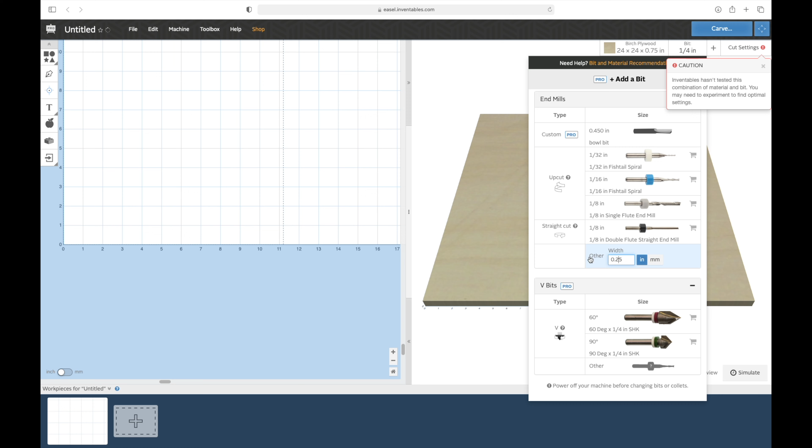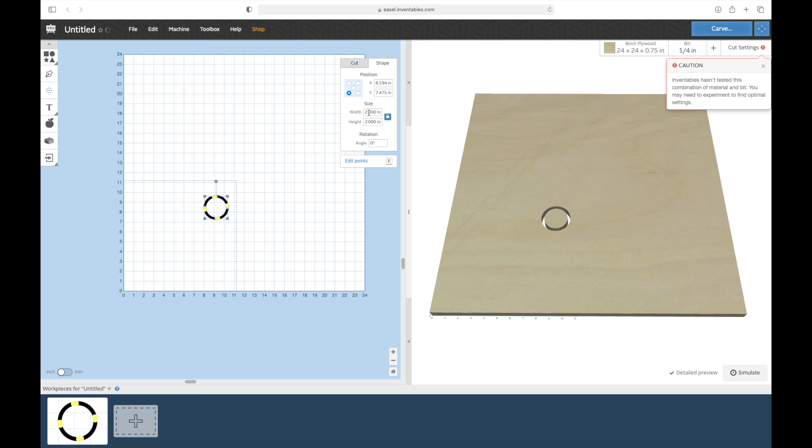Now over here, we're going to make our circle. We're going to make this a 20-inch circle, cut all the way through, cut outside shape path, lock that, and now turn that 2 into a 20. Center this to the material.

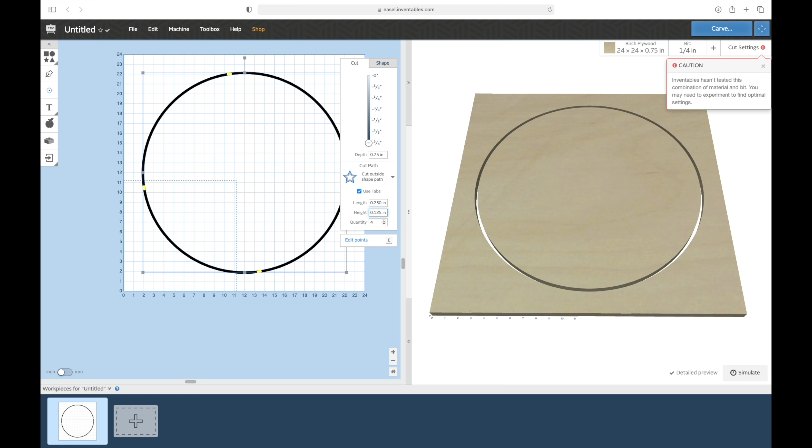And we want to use tabs. Make sure you got your tabs on. I'm going to change the height of my tabs to 1/8 inch, or 0.125. And I believe that's ready to cut.

I'll also say that if you're unsure of the feed rate, Easel is pretty good about setting up everything automatically, but you can change it to manual and make things a little faster. The machine I'm using is definitely capable of doing this faster than 30 inches per minute, so I'm going to go ahead and change that.

Now once we have that first baseboard cut out, we can go ahead and use the same 20-inch circle we used before, and now we can add the circles that the rods will sit in. So we'll add a circle, and we're going to make that a 2-inch circle. So we'll go ahead and lock it.

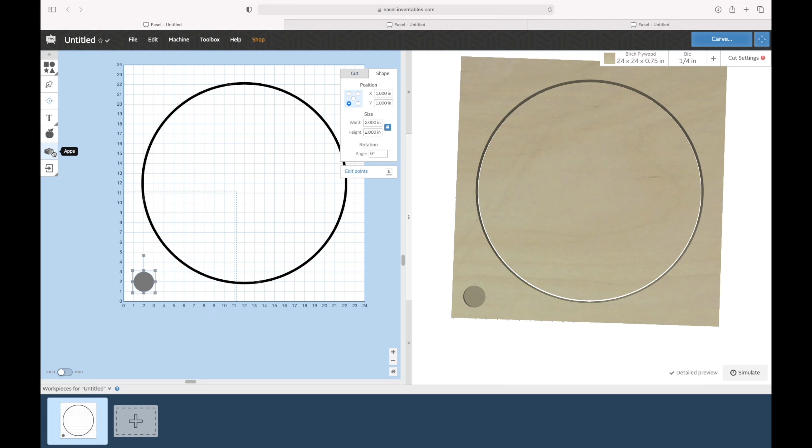Now with it selected, we're going to go up here to apps, and we're looking for radial array. Right here is radial array. Click on it. We're going to do 20 rod holders, so up here at shape count, we're going to do 20. Now this is where it gets kind of confusing.

It's speaking in radius. I want about 1 inch from the outside, and then we have a 2-inch circle, so that's 3 inches. To get to the center of this 20-inch circle is 10. So 10 minus 7 is 3. So we're going to put a 7 up here.

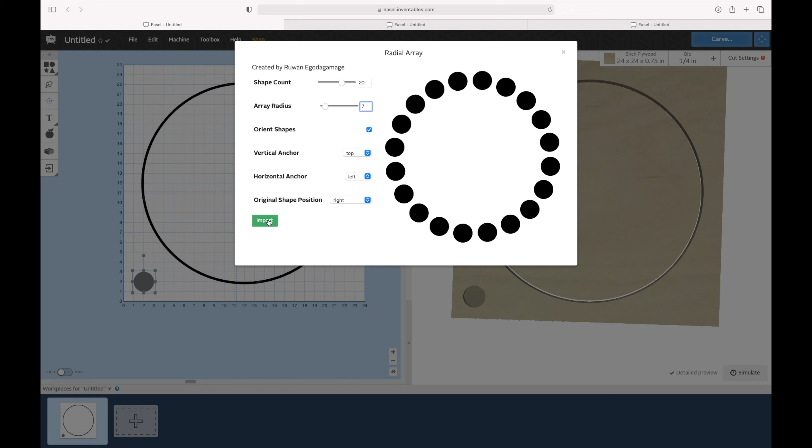And we're going to import that. Leave original.

So now that it's up here on this page, we're going to go ahead and move this over here out of the way, and we want to move this big circle down out of the way. Now we want to select all of these, and we're going to combine them, so now when we want to move it, they're all moving together in uniform.

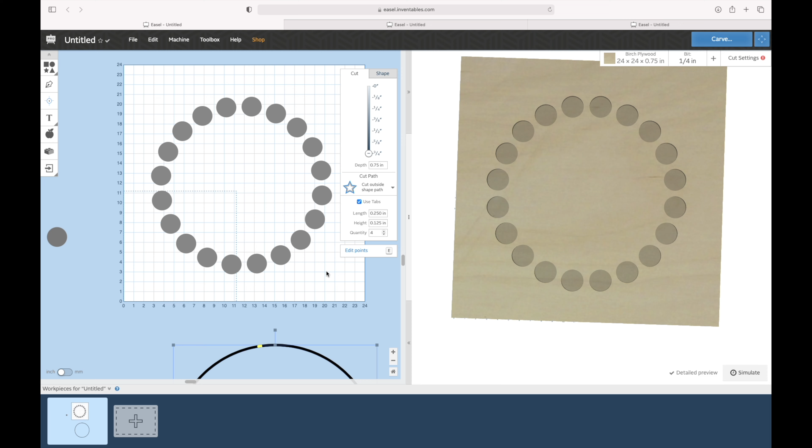We're going to change that to about a 1/4 inch pocket, and we're going to leave it clear out as pocket. Now we can go ahead and select both of these, and we can center to material.

I think that looks pretty good. We'll probably stick with that.

Now with this circle, we can go ahead and change it. We'll use this one for the dowel rod that I'm going to use for the pedestal. The dowel I have is 1 3/8, so we'll change this to 1.375.

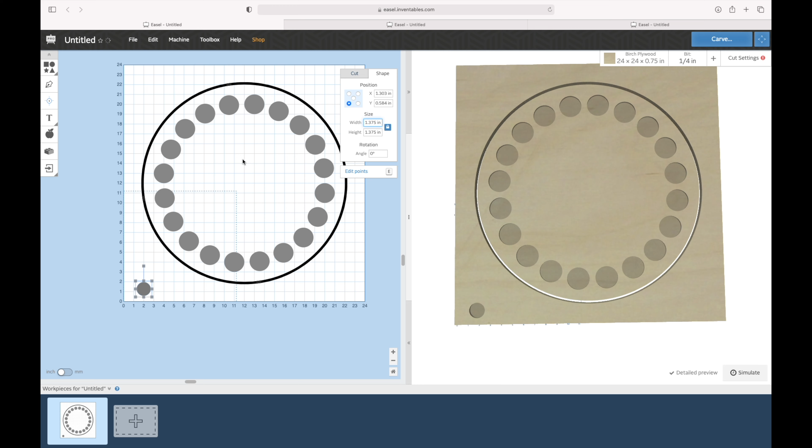We'll center that to material, and I want it to be about a 1/2 inch deep. I think that looks pretty good. The tabs are the same as before.

So we'll go ahead and center this again in case we moved anything. And now that's ready to cut.

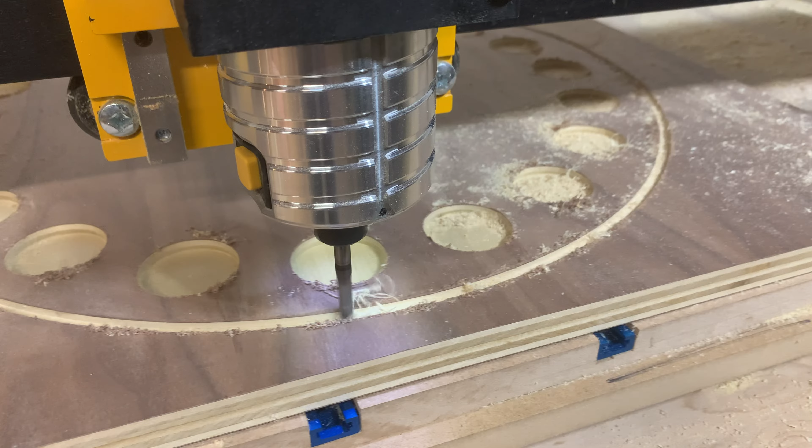Now that we have both the bottom base and this rotating board cut out, we can go ahead and make our top pedestal piece.

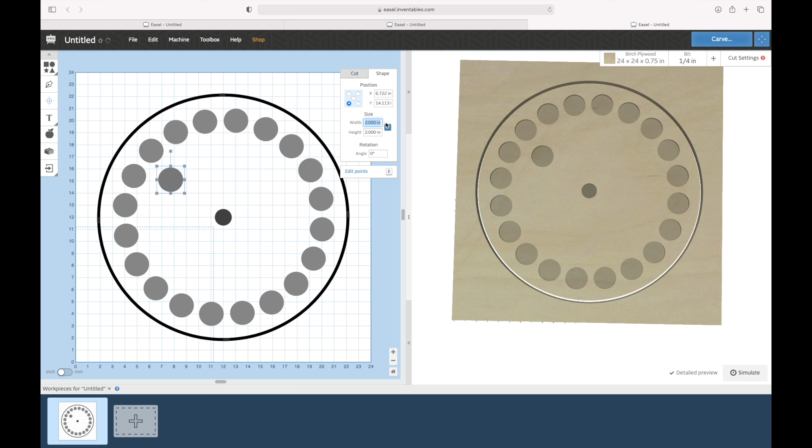So we'll make another circle, and we want it to be just inside of all these circles. Let's try to make it 14 inches. That's good, that's what we want. We want it just inside these outside circles here. So we'll go ahead and copy this.

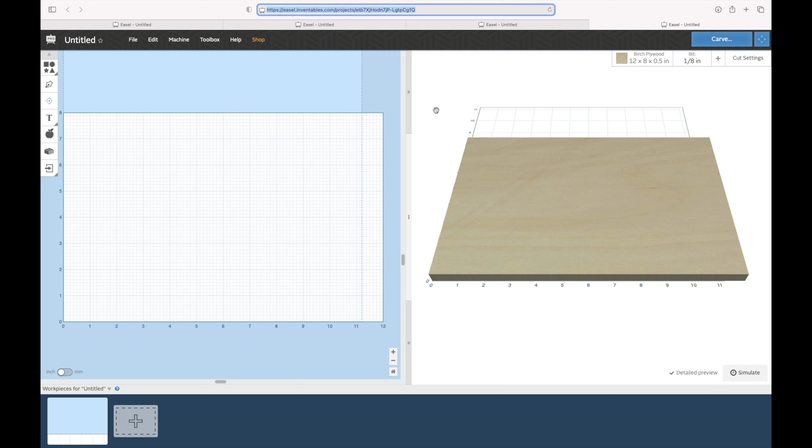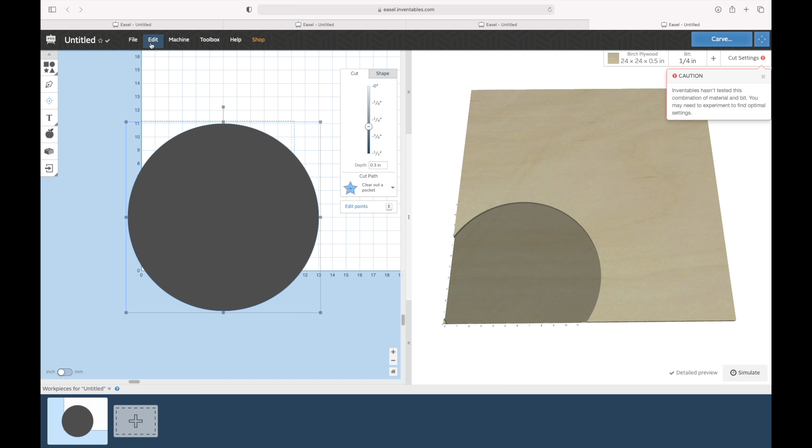Let's start a new tab. Change our dimensions again. This top piece is going to be 1/2 inch, so we'll leave that alone. We're going back to the 1/4 inch size bit. Bring that into view now, and we'll go ahead and center that. This will get cut on the outside shape path and all the way through.

Bring our tabs up to 1/8 inch. That's not necessary, I just like having a little bit beefier tabs because I go faster with my machine.

When we cut this out, it will be the bottom of the top piece. I want to add little tabs on the bottom that you won't see from the top, and these will be placement markers to show me where I need to put the fishing pole holder clips. Otherwise it would just be a guessing game for me.

So select that circle. I'm using a 1/4 inch bit, so it needs to be just a little bit bigger than a 1/4 inch. We'll go 0.3, and with it still selected, we'll go back up here to apps and radial array.

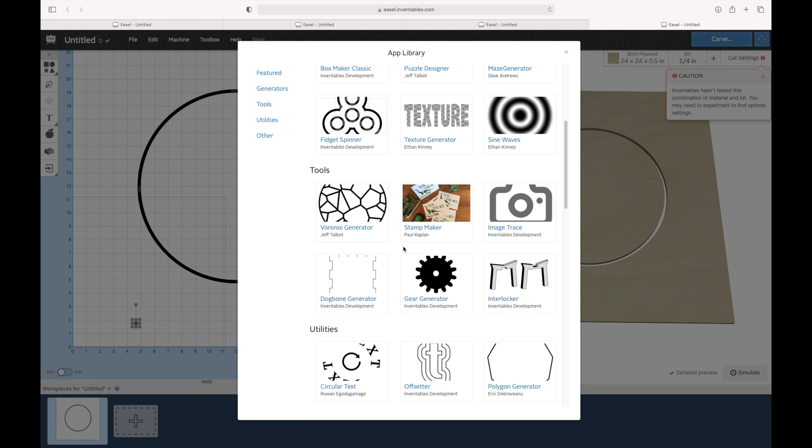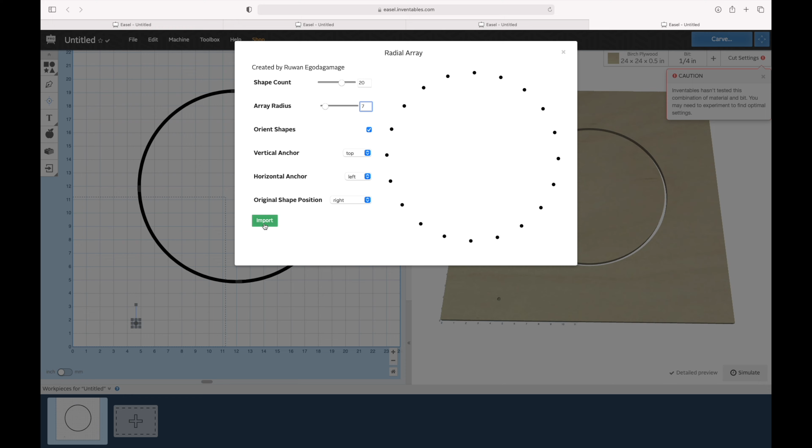Again we're going to do 20, and we want these to be right on the outside edge almost. So since it's a 14 inch circle, we'll just do a 7 inch radius and import that. Leave original size and bring these down again to get them out of the way.

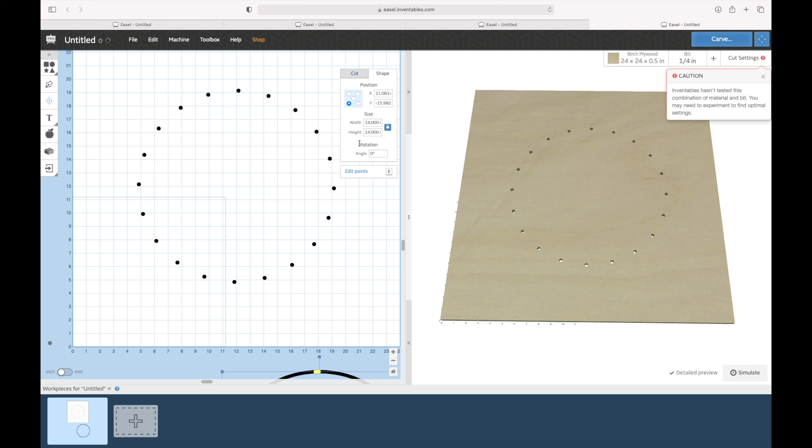And combine all these. Center that to the material, come down and get this little circle, the big circle, and center it to the material.

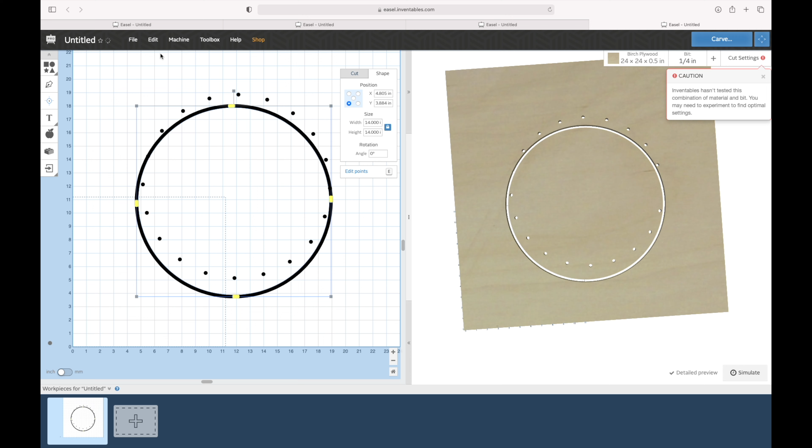And we can see here that the small tabs are too big. So let's bring that circle down, select this circle. It's a 14.6, I don't know where that number comes from. Let's change it, we'll drop it down to 14 on the dot and see what that gives us. That's what we want right there.

Let's bring them up, they're just going to be little pockets. 1/16 inch deep is really all we need, just something to show us this is where we want the fishing pole clips.

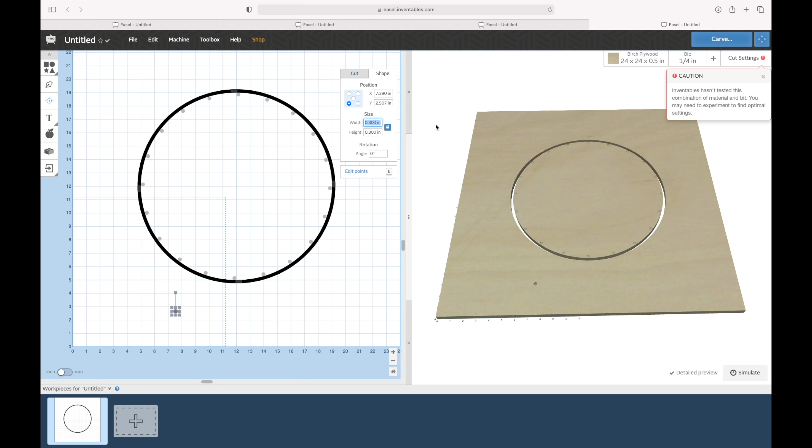That looks pretty good. So we'll bring this circle up again and change it to 1 3/8. Center it to the material, and we're going to cut it 1/4 inch deep. So now that is the bottom side of the top piece, and it is ready to cut out.

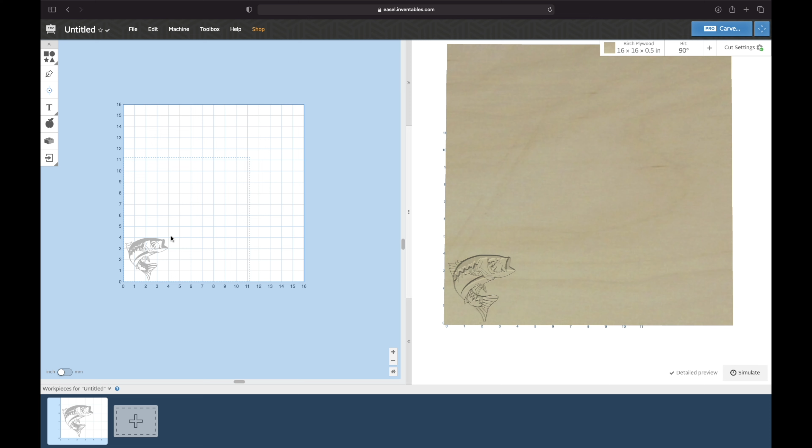And finally, for the top of the top piece, I've already uploaded this SVG of a bass. This file was free, I'll put the link to it down in the description below, and we're just going to eyeball it. I've also got it set for a 90-degree V-bit, so if you're not paying for Easel Pro, you won't be able to do this with the V-bit.

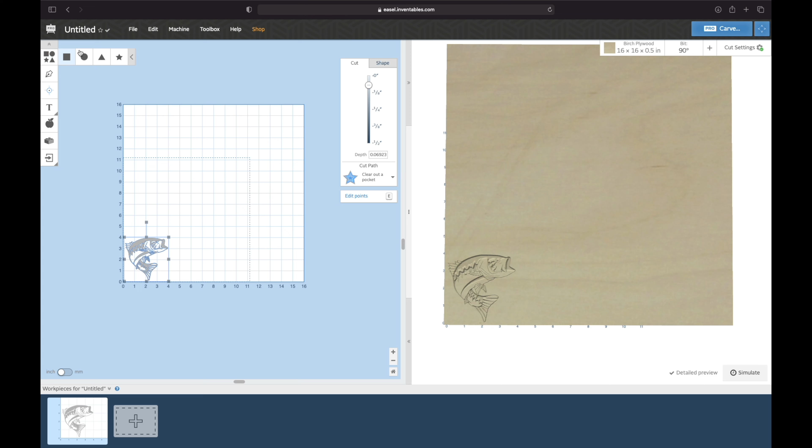But we're just going to eyeball it, and I know that top circle is a 14 inch circle, so let's go ahead and make it 14 inches. Do an outline, that way we know we've got to stay within this.

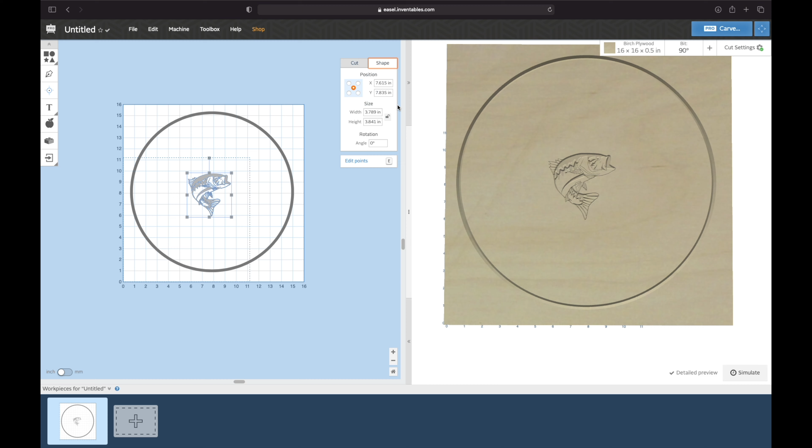Bring this up, resize it. This is just whatever size you want to make it.

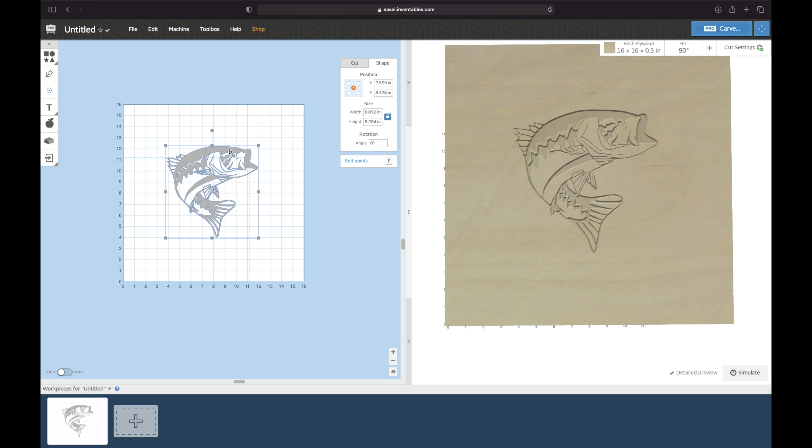So with this circle already cut out, I'm just going to eyeball it. I'm going to take the circle out, and I'm going to change this position to the center, and I'm going to go ahead and zero these out.

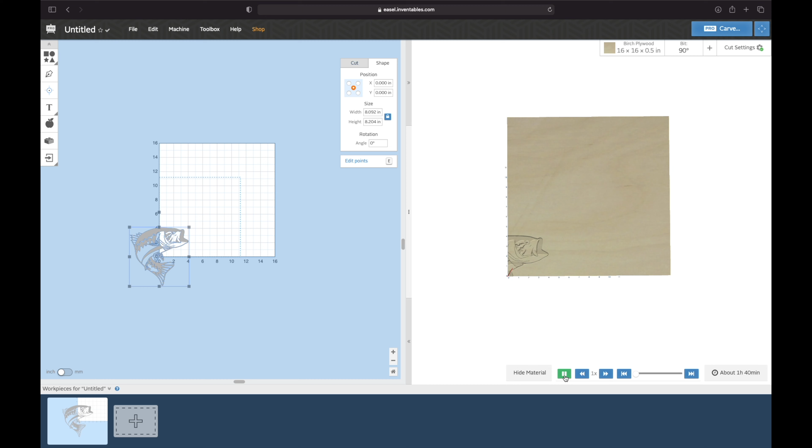What this will do is create the starting point right in the middle of your cut. So even though all these are not on the grid, it will still cut this out. Okay, looks pretty good, let's build this thing.